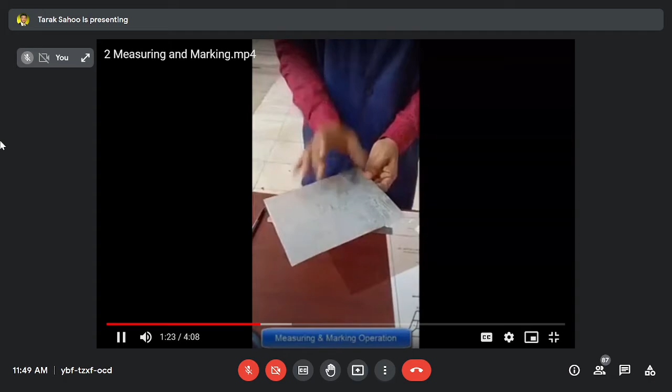Proper direction means our experiment is to prepare a square tray. For the square tray, we require a square sheet. We got the material according to instruction, and it should be a square. Square means each side should be at a right angle.

How will we check a right angle? This tool is called a try square. Through this tool we can check the right angle. First you take any side of the material out of four sides, whichever is straight. That side you keep. The try square has two parts: one is the stock, another is the blade.

You first mark A, B, C, D on the four sides. First you mark the origin point, meaning the reference side, like A. Then you put your try square like this, in any position you can. Then A remains constant, and you draw a line.

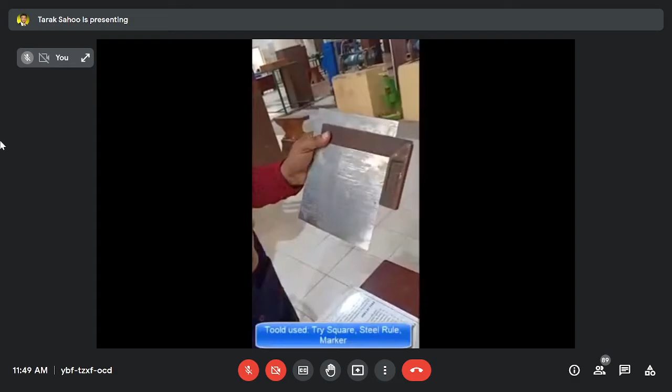So now A is the origin, meaning the reference side. It has no lines yet. This line is named B. Now A and B are at 90 degrees, according to the try square measurement. So now A and B form a right angle. You have to achieve a 100 by 100 millimeter sheet.

So from B, you mark a point on the left side, at a distance of 100 millimeters. Take 2 points for the straight line. So this is 2 points, and you have to join these 2 points, like this.

Once joined, you can also check if it is a right angle or not. Now see, it's a right angle perfectly. So this is A, B, and this line is D.

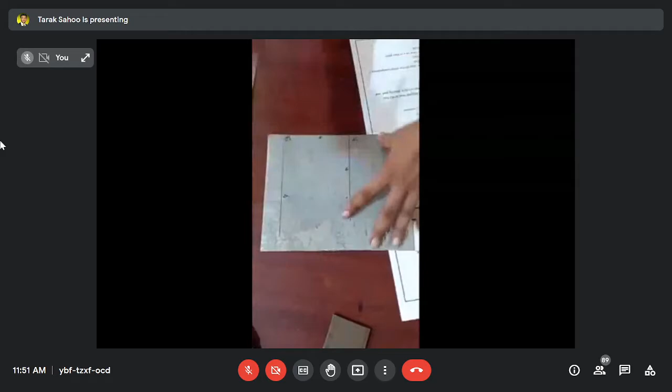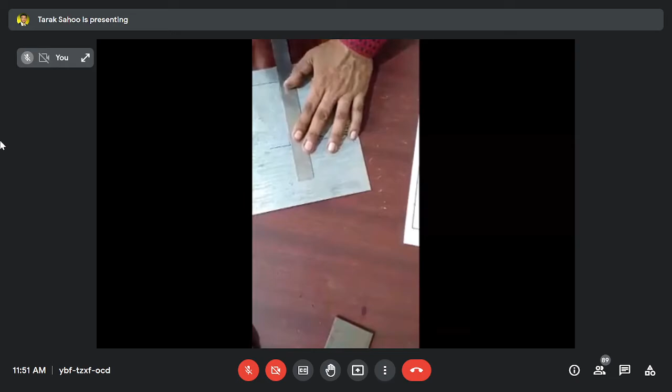Now one side is pending, A to another point, at a distance of 100 millimeters. You make point A, then point B, then connect each point, and you get the sheet. You see here A, B, C, D — this area is 100 by 100 out of this material. We have to cut this material and find out our raw material for the experiment.

So this cutting process is named blanking. Sir, can you please repeat the dimension again? Okay sir, basically we have to cut 10 centimeters by 10 centimeters from a sheet.

First I'm discussing this: if you have a sheet more than 100 millimeters in size, you have to cut it, but first mark it 100 millimeter by 100 millimeter, and each side should be 90 degrees, because you are preparing a square tray, so your base material requires a square shape. So for that reason, first measure it 100 by 100 on each side, then start the cutting. So next video you'll cut — simply first mark and measure 100 by 100, then cut, making sure each side is 90 degrees by 90 degrees. Then another marking will start.

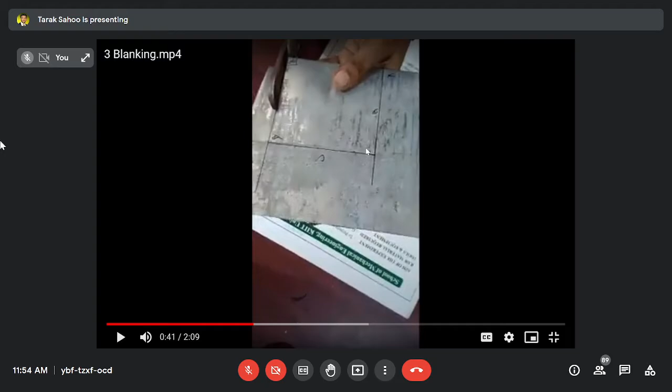Watch this video. As per the marking, you have to draw a line on your paper sheet, then you start the cutting.

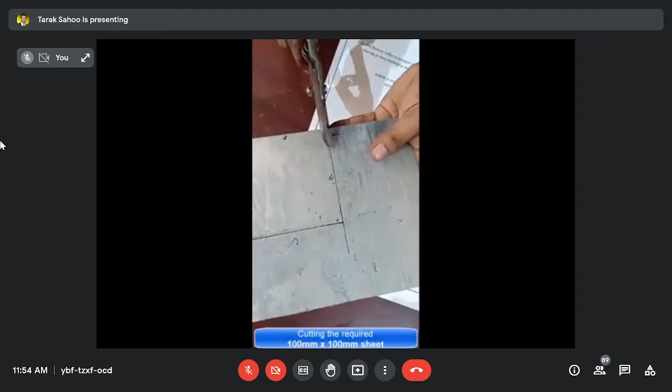Sir, can we make the square start from any corner of the sheet, or do we have to draw just from the middle? If you're taking any corner, it will be better for you because your A4 size sheet already has right angles on both sides, so you only have to draw the point at a distance of 100 millimeters. It will be better for you if you take any corner.

After this material blanking operation, once again you can check its dimension and squareness. First we'll check the dimension. You see, here is 100 millimeter and this one is also 100 millimeter.

And angle means squareness, how do you check? Once again, if this line matches, it means it's a right angle. This line matches, means it's a right angle. This line matches, then matched. If all four sides match, it means now it's perfect squareness.

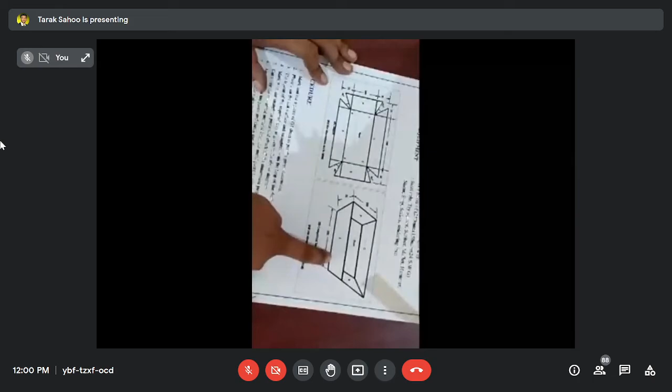So now we'll follow the diagram, the layout. Here two diagrams are available: one is the layout, another is the completed tray. So first we follow the layout. According to the layout, we have to prepare it.

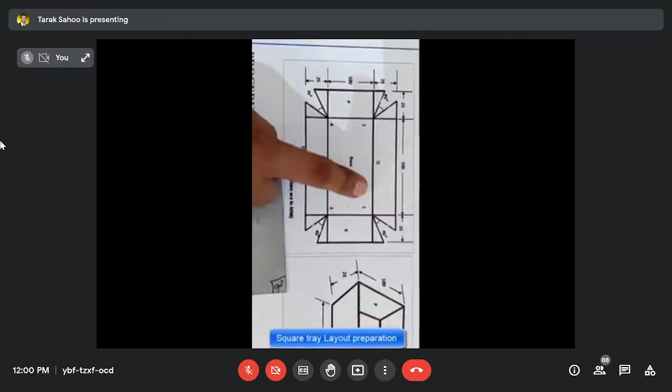First, according to the layout, we have to do the marking. Now here is the division: one is a 25 millimeter partition line, midpoint is 50, and another is 25. Same thing, this one is 25, center is 50, and is 25.

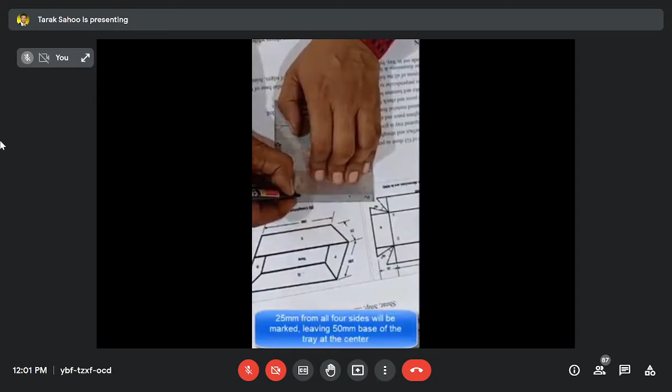Now it's complete, check once again. Sir, what was the dimension? It's 25, center is 50, another is 25 millimeter. So each side is 25. The center square dimension is 50 by 50 millimeter.

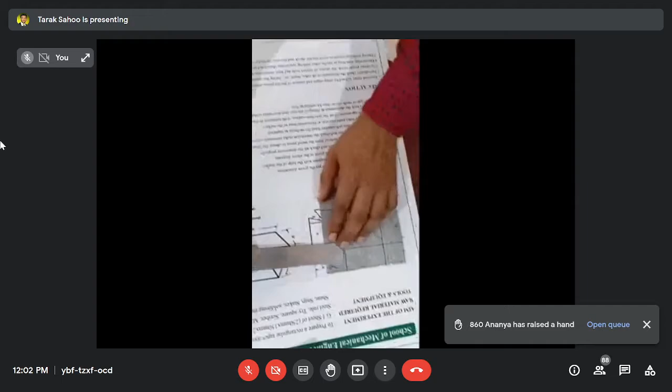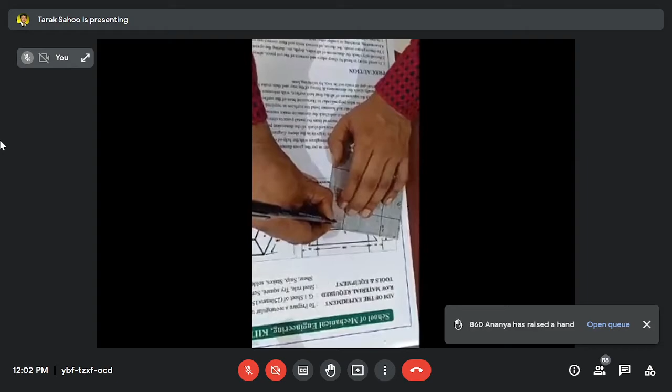Another thing: once you draw according to the instruction sheet, you will draw another line from the 50 line onward, on the right and the left, choosing any two sides. The distance for this is 8 millimeter. You make a point at a distance of 8 millimeter, like this.

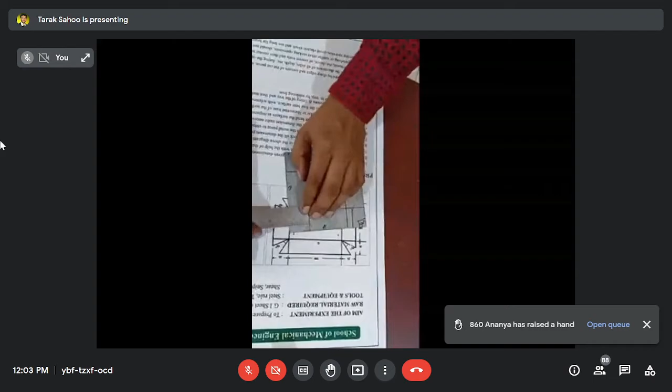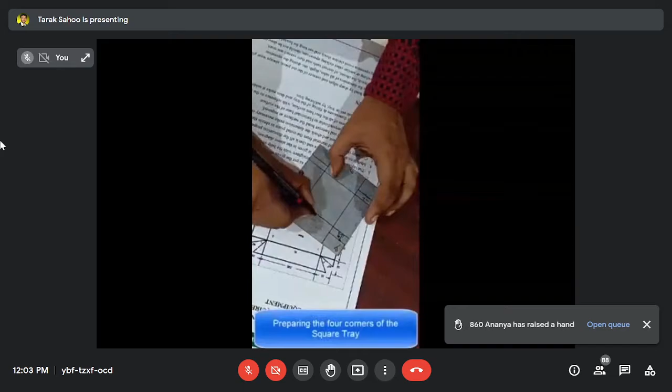Then you will draw the line. Same here, 8 millimeter, 8 millimeter, then the line. Okay, this distance is 8, this distance is 25, this area's distance is 50, and this is 25, so 8.

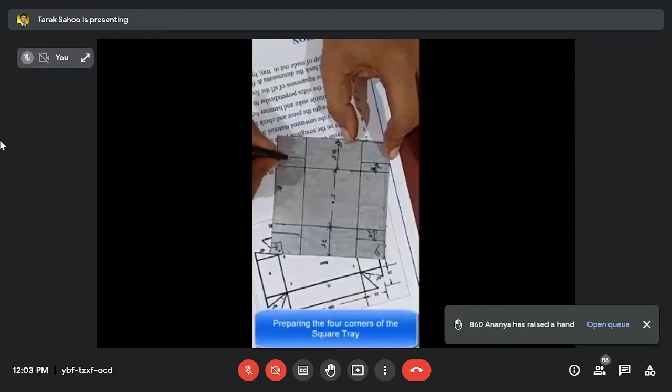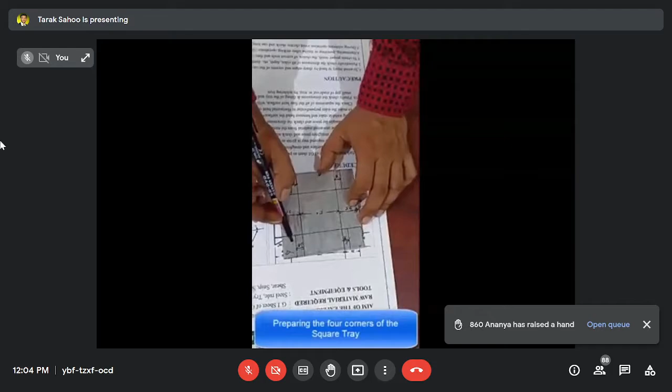After this type of marking, then we have to draw a 45 degree angle here. So how do we draw the 45 degree angle? Now, in the corner, there are already 4 small squares. You see, this is a small square: 1 rectangle, 4 small squares, 4 rectangles, 4 small squares, and in the center is a big square with dimension 50 by 50. But for the small square, you have to draw the diagonal for the 45 degree angle.

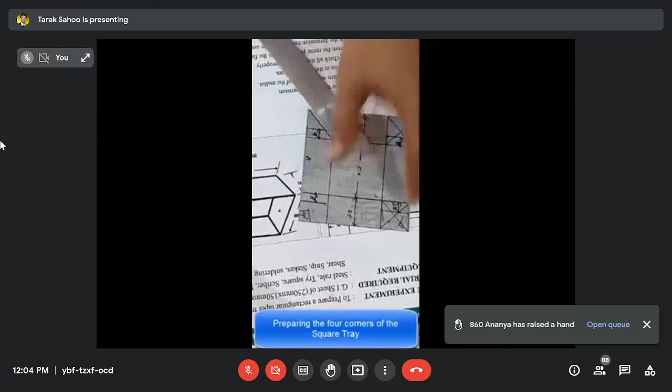Now it's okay. So you see, this angle is 45 degrees.

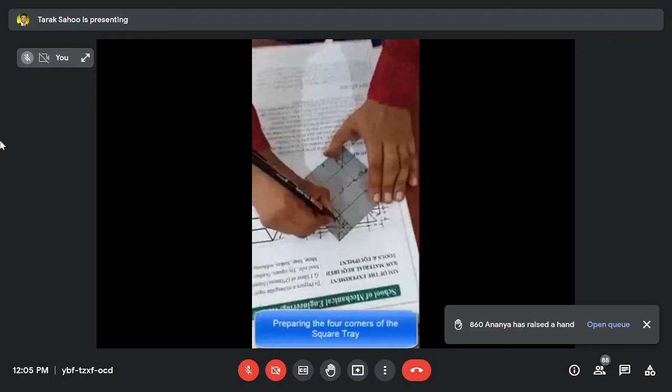So now we follow the instruction sheet and go to the next step. The next step operation name is notching operation. So now we'll follow the diagram, the layout.

Okay, dear students, now you draw the lines of marking according to the video on your 100 by 100 millimeter paper, whichever you collected. Then you draw all the lines and marking, and then show me. If you want to watch the video again, I will play it, or show you a still photo of the particular lines.

Sir, can you show us the diagonal line measurement, that 8mm diagonal measurement? Okay, once I will play the video and watch, you tell me the particular point, then I will stop the video and you watch it.

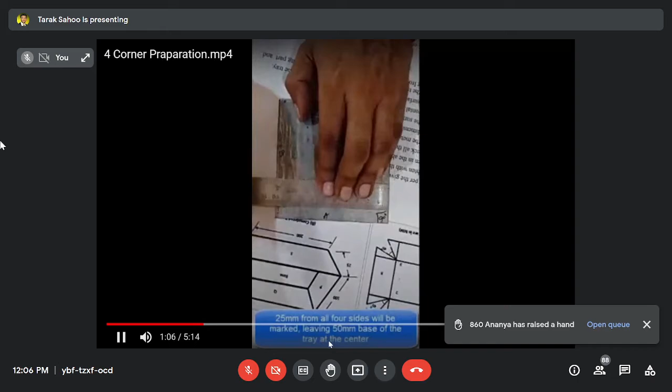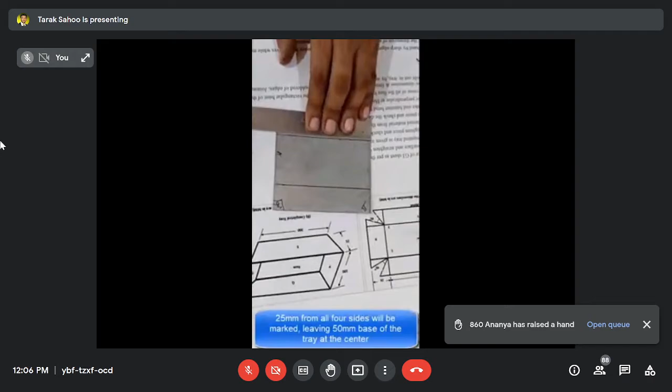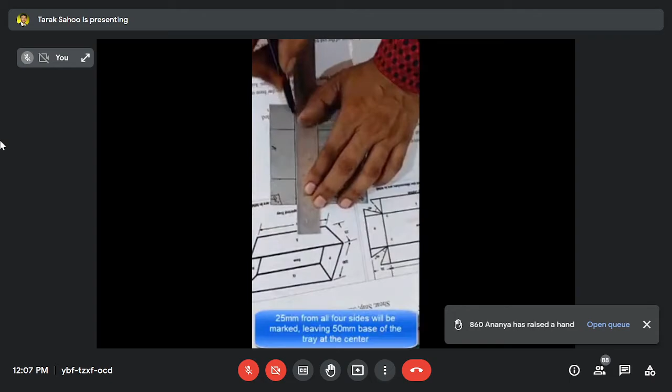So here, now it's complete. Check once again. It's a 25. Center is 50.

Follow, dear students, look, how to divide the partition line. Now, from the outer line, you take it to 25 millimeter, 25 millimeter, and draw the line each side. The center will be a big square, dimension 50 into 50. Each side is 25, this area is 25 millimeter and this is also 25. This center is 50 millimeter.

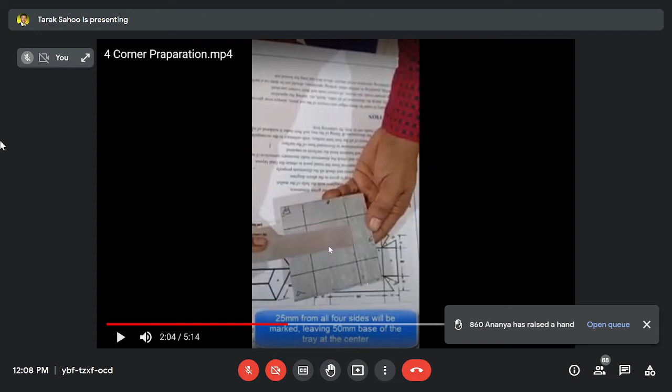So first you divide it, then draw the 8 millimeter lines here and here and here, and then draw the diagonal. You will get the 45-degree angle. Now watch.

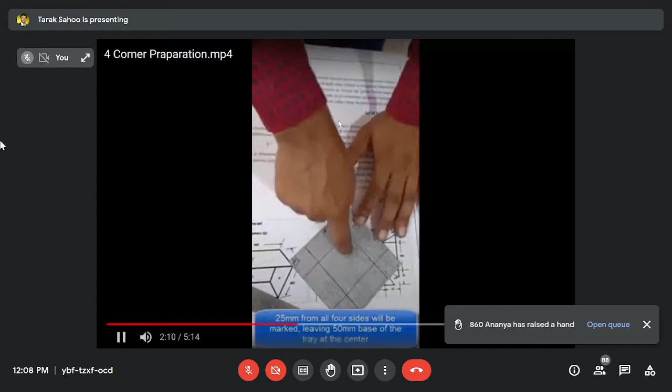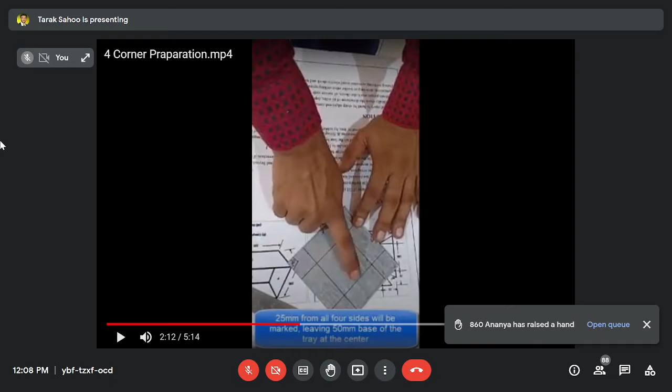50, another is 25 millimeter, so each side is 25. Sir, please mute, it's echoing. That's the center square dimension. Sir, while playing the video, mute yourself.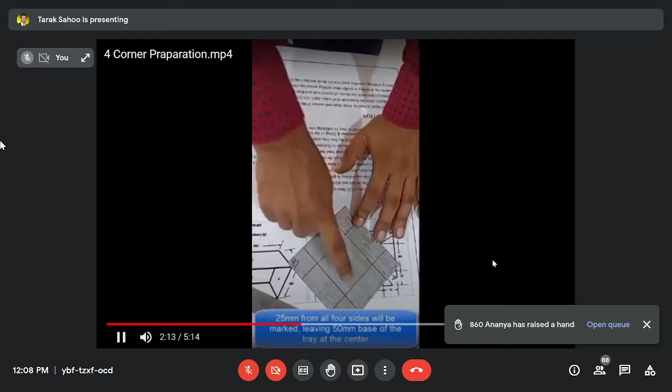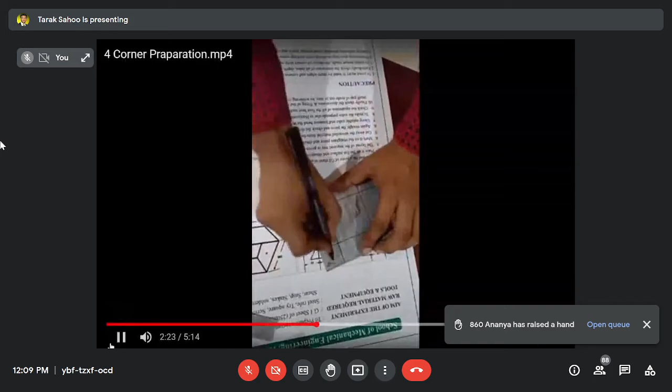25 to 50 millimeter. So another thing, once you draw according to the instruction sheet, you will draw another line from the 50 line onward, on the right and the left, any two sides you choose, which dimension or distance is 8 millimeter.

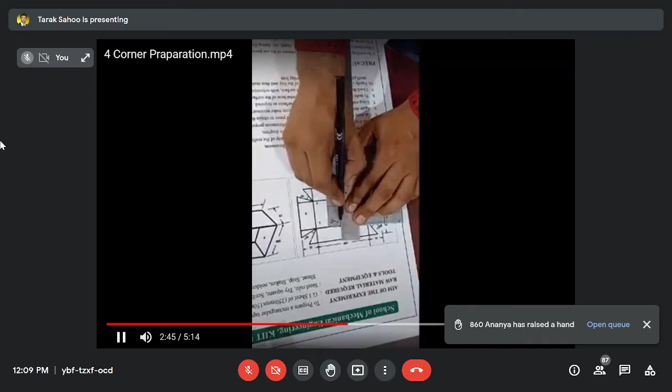You make a point at which distance is 8 millimeter, like this. Then you will draw the line, same here, 8 millimeter, 8 millimeter.

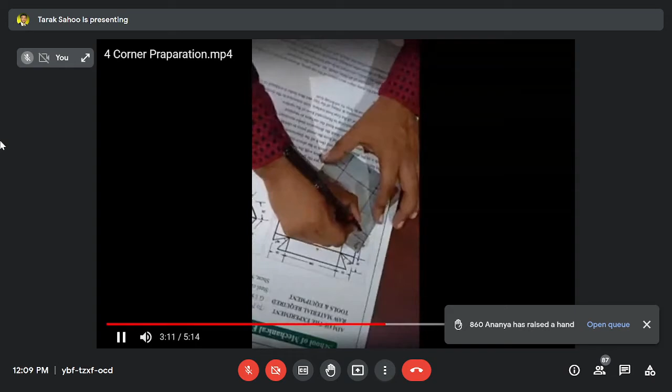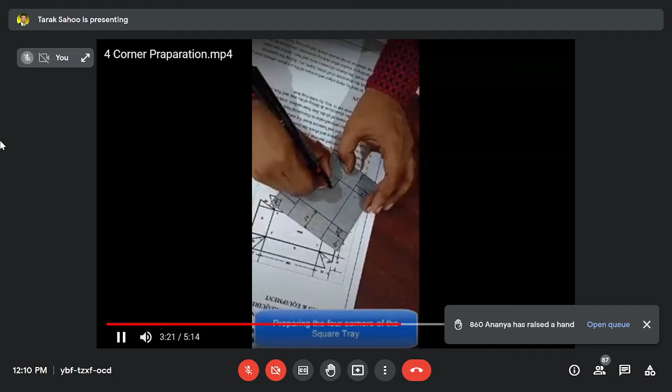This distance is 8. This distance is 25. This area distance is 50. And this is 25. So 8.

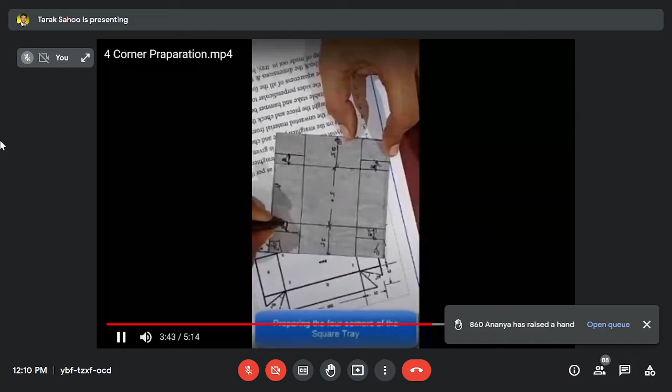So after this type of marking, then we have to draw the 45-degree angle here. So how will we draw the angle of 45 degrees?

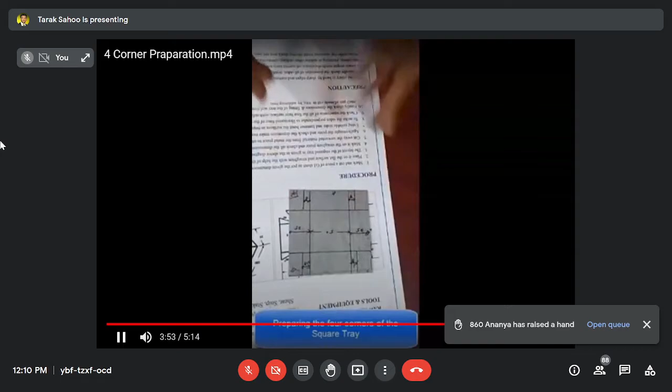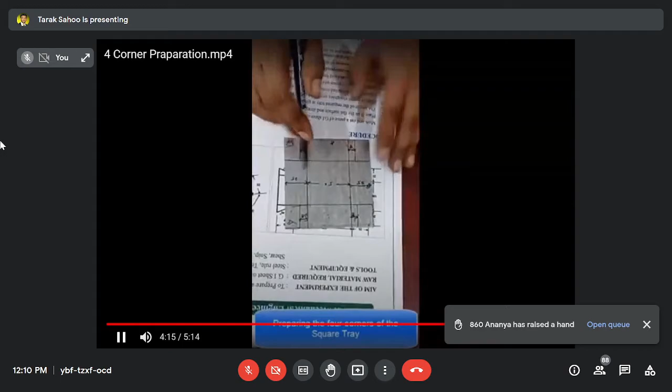Now you know, in the corner, already 4 small squares are here. You see, this is a small square, 1 rectangle, 4 small squares, 4 rectangles, 4 small squares, and in the center is a big square, dimension 50 into 50. For the small square, you have to draw the diagonal for the 45-degree angle.

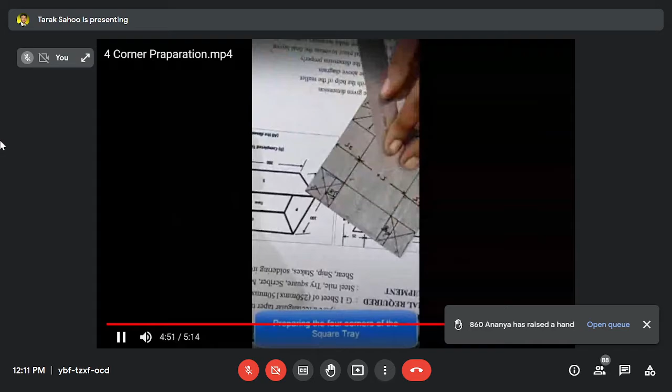Now it's okay. So you see, this angle is 45 degrees.

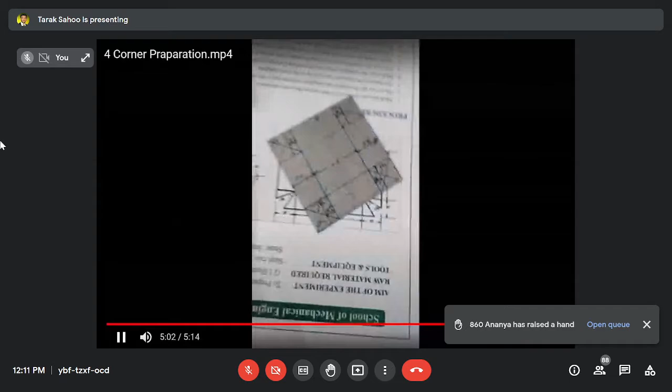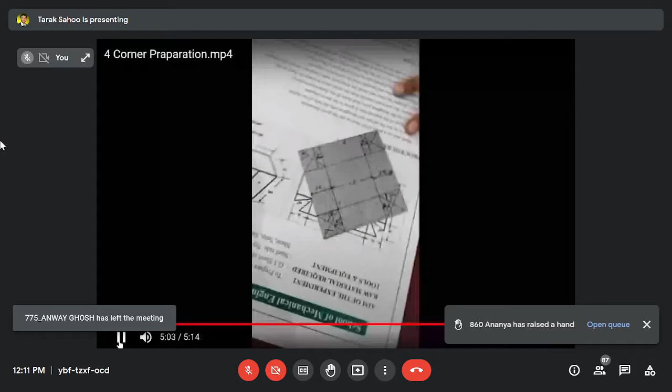So now follow the instruction sheet and go to the next step. The next step operation name is notching operation.

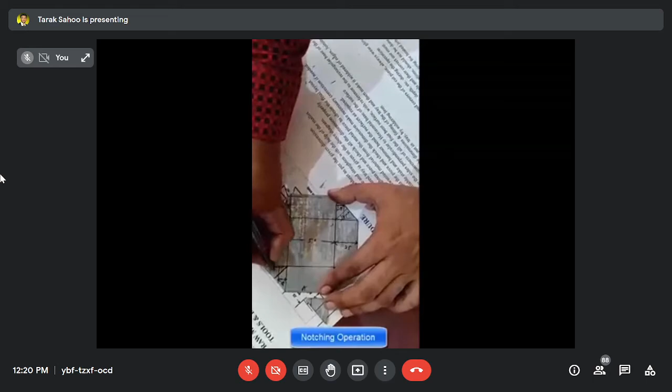You remove the triangle which is present on the corner of the small square. First you remove that by cutting it. Then, understood - another triangle is here present. You see, this is another triangle. This point 2 and 3, 4 - these 4 triangles you have to remove. How? Like this.

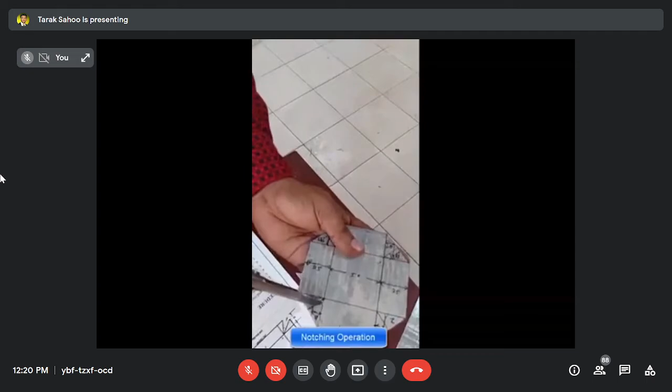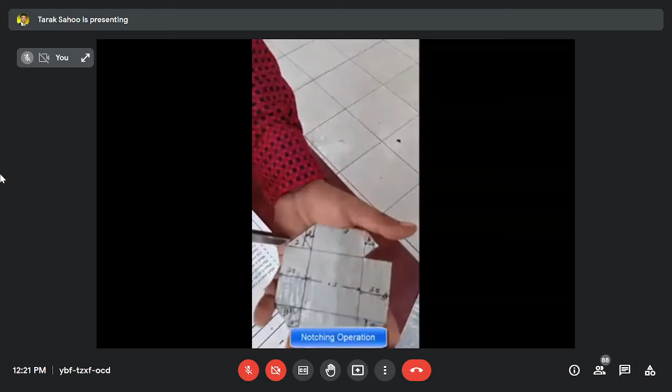Don't cross the 50 line during the cutting. Okay, then like this. Removed, you see is removed, and here cut, removed. Next.

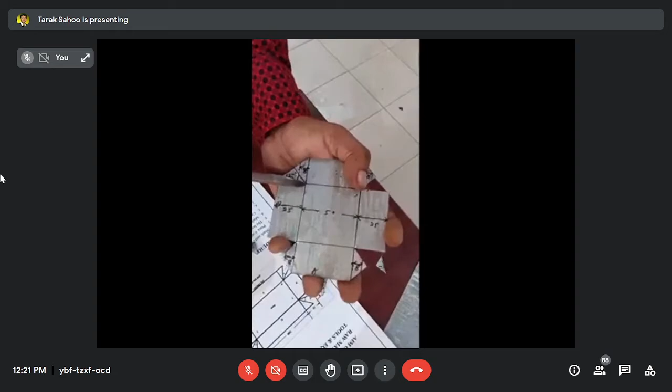Okay, you see, so after the cutting and removal of both triangles, you will get this type of shape on the metal sheet. And the next step, you have to remove another small triangle here, present at 1, 2, 3, 4. You see, this is a small triangle. You can remove it, I can cut it.

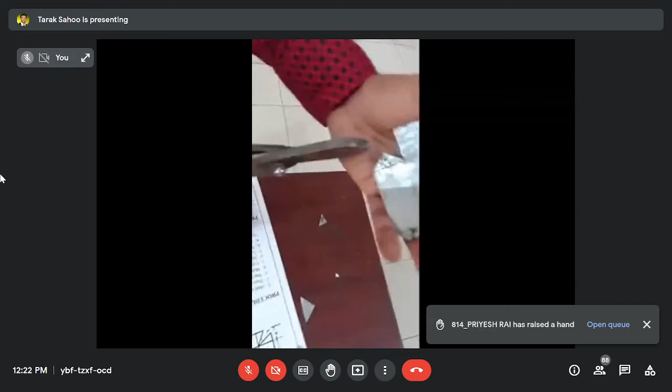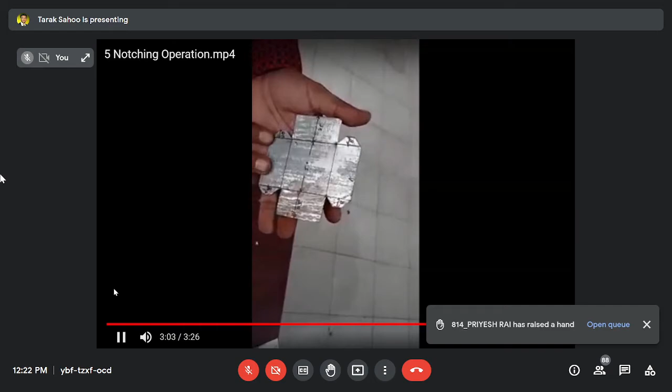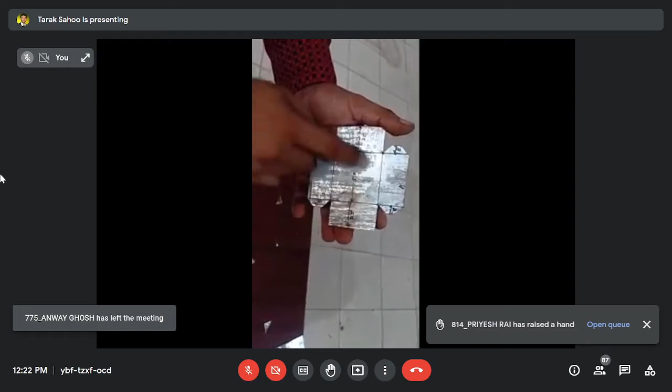Okay, so now see, after cutting we'll get a rectangle at 1, 2, 3, 4, a trapezium at 1, 2, 3, 4, and a square whose dimension is 50 by 50 millimeter, and this distance is 25 millimeter, 25 millimeter, 25 millimeter, 25 millimeter, and this distance is 8 millimeter. So clear?

Notching means, in the type you see, this is your diagram, layout diagram. First you have to cut it, and simply you remove the triangle of the corner of the small square.

Okay, so first step you remove the triangle which is present on the corner of the small square. First you remove that by cutting it. Then another triangle is present, you see this is another triangle, this point 2 and 3, 4 - these 4 triangles you have to remove. How? Like this.

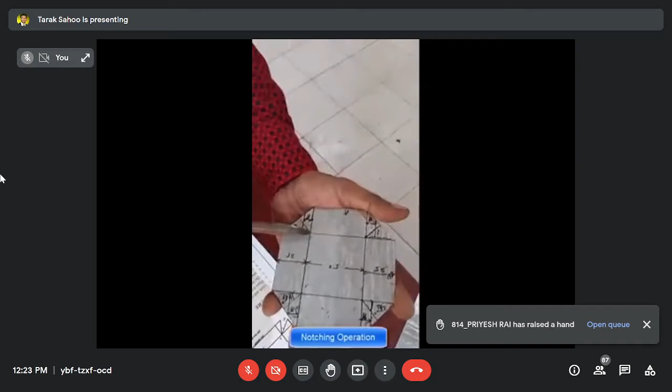Don't cross the 50 line during the cutting. Okay, then like this.

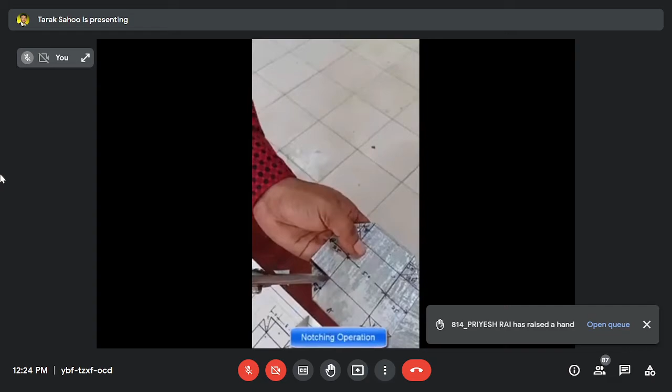Removed, you see, sir, 745, and here, sir, is it okay? 745. Okay.

A02 first, okay, sir, 755 done sir. Okay, 767, 34, 46, Saurabh. Okay, so 56, 751, 51, okay. 58, 51, good. 14, yeah, perfect. Ananya, yeah, 861, okay.

So you have to cut the 755. Yes, your dimension is not perfect. Your wait, 55, your dimension is not perfect because the center should be 50 by 50 and each side the height of the trapezium should be 25 by 25. But your height I think is 15 or 10 millimeter. You once check it and prepare once again. It is wrong totally. No sir, it is right but slightly off. No, you look, cutting means the area dimension is not 50 by 50. You check once again. Okay sir.

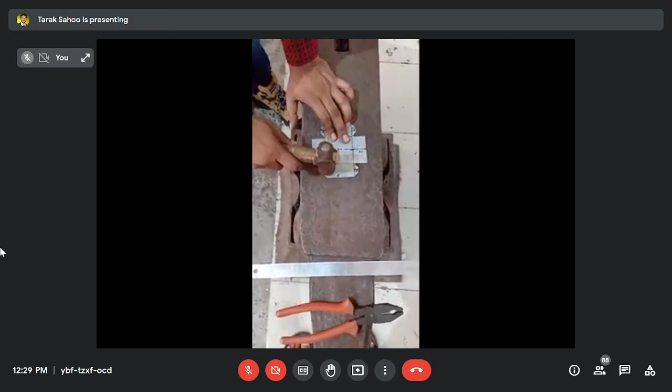Before bending, you have to make a plane surface. How? Through the hammer on this anvil, you put your sheet on the anvil surface, on the anvil face. Then you give a small blow, a small amount of pressure, just striking lightly. Don't strike heavily. It will be flat and straight. Now it is perfect.

Next step is the bending process. What is the bending process? Bending is one type of process through which we apply some amount of pressure or force to a particular point to find the desirable angle or shape on the sheet. This is called the bending procedure.

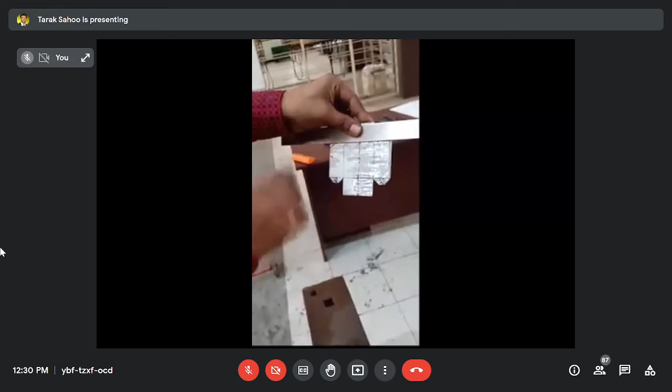Now we keep a steel rule on the line of 25, like this. And this is a plier, it also helps to bend the material. You keep it on the surface of the anvil both at a time, you can fold it with the steel rule, and you hold both the steel rule and the sheet at a time, and you apply pressure to get the bending. Same for another side.

Look, after bending, we'll get this type of shape, but this is not perfect. Why? According to our instruction sheet, we have to make the size 50 into 50, the area of our base, and height should be 25 into 25. So first we have to check it, is it 50 or not. You see the 60 above, and another side is 60 above. It means it is not perfect, we have to make it square. Square means the base should be 50 into 50, meaning the top should be 50 into 50 millimeters. So how will we make it 50 into 50?

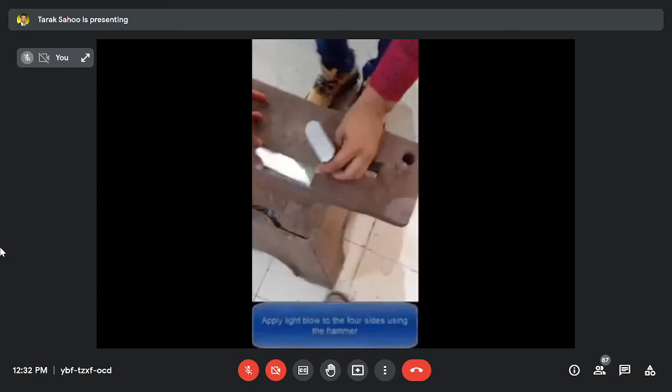How? Now, one procedure: put this edge, you have to strike. You see, now this one is 50, this one is 50. This means our tray dimension is perfect now.

This means we confirm my dimension is perfect, meaning you have to lock it. This trapezium you have to bend and lock. How? This instrument, which I told you about in the first, this is a vice, the holding device. It has two jaws, one movable, another fixed jaw. If you want to hold some things, some tools, like this stake, this one is called a stake.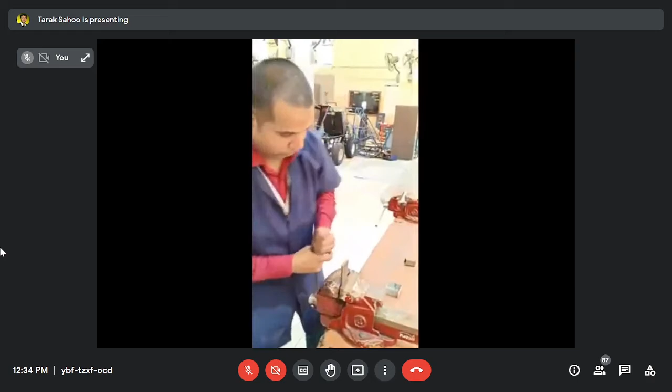So according to the stake, you have to make it. First, you have to hold this one. How? Like this, we hold this one. Okay, you see? Now it's perfect, you have to only lock this four side.

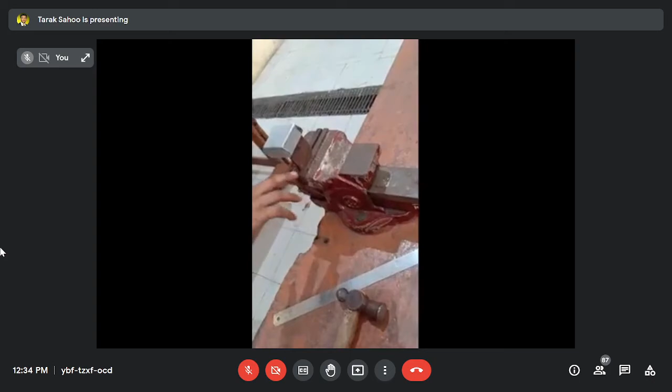So what should we do? Now first, you keep and put your tray like this on the stake which is fixed on the bench vice. Then you place your fingers and pull outwards. Then you hold your hammer like this, not like this. Then you apply pressure by striking.

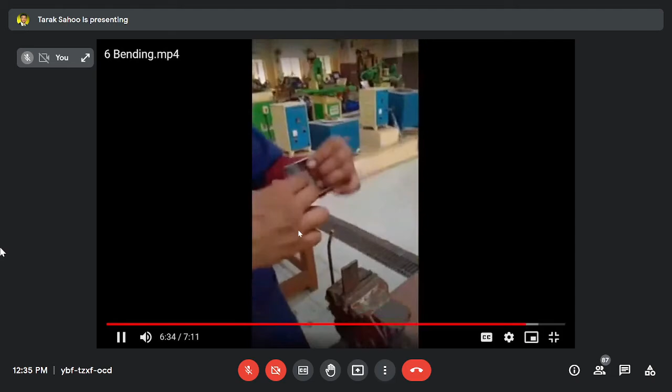Okay, now see, it is locked. It will never open because we locked this one. You see this folded.

Okay, then once again we'll check. It's a 5 and it's a 5, means now it's perfect. One thing, after the folding, there should be no gap between the two metal pieces because you have to join this surface through the soldering process.

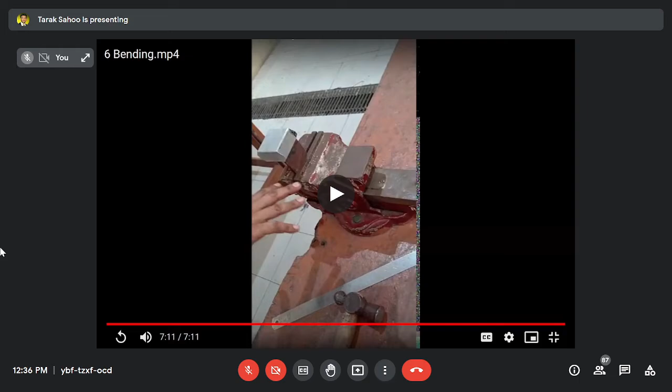Sir, we will stick the ends with gum. Yeah, so now you fold your sheet, paper sheet, on each side, 4 sides there, means only 25 will fold. 50 is your base, like this. Miss, yeah, like this. And on the blockage, the lock area, you use the glue. Like this, sir. Yeah, you use the glue. Okay.

Okay, so wait. So after completion of this video, one more video is there, and one is the soldering process. So after 10 minutes, you complete your paperwork. Then you write your name or number. You send the photo, and I will give a link to you. So now you watch another video, which shows the soldering process, meaning how to perform soldering after completion of the folding and bending operation.

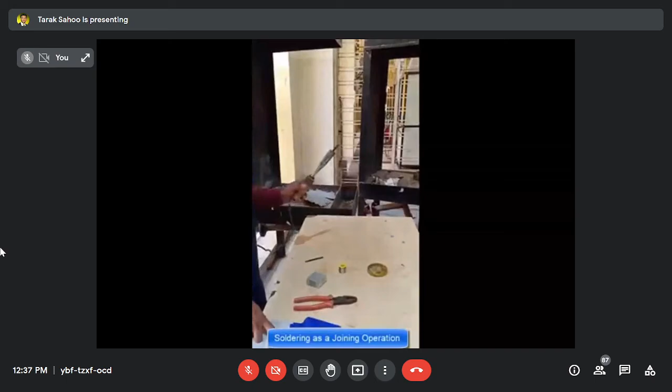After the bending, we will start the joining process. Sheet metal has many types of joining processes like soldering, brazing, riveting, hemming or seaming, but here we have to do soldering operation. For the soldering operation, we'll use plier, hand gloves, flux, solder and soldering iron. So for safety reasons, you have to wear your gloves first.

Then plier. Why is plier necessary? Because this instrument is very hot, so when you hold it by your naked hand, it will damage your hand. So always use plier during the soldering operation. So first we'll check if it's perfectly hot or not, because we have to melt this material. If it melts, it means the soldering iron is ready for the soldering operation.

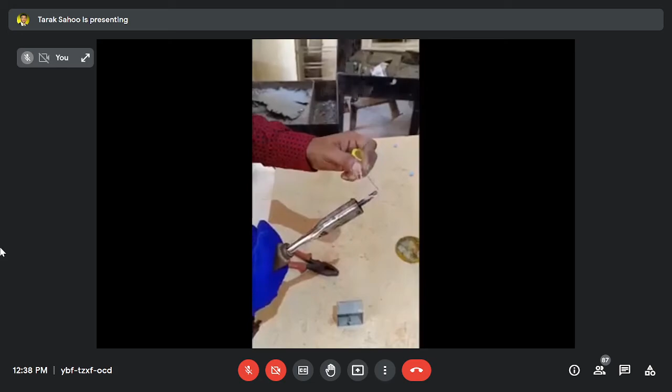So before soldering operation, any type of scratcher material will be used for scratching the edges on the part we want to solder. Why? It helps to easily solder on the surface, because any type of carbon or foreign material deposited on the surface of these edges makes soldering not easy. So it is necessary to first scratch this portion before soldering.

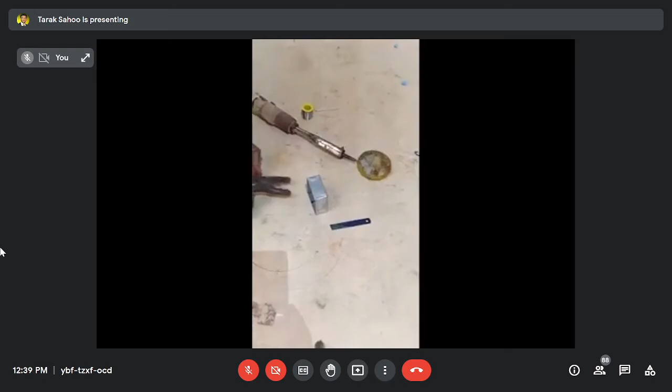Now you hold the soldering iron and solder. So flux, when will you use it? Flux is really used. Why is flux used? Flux is a material with zinc chloride which helps protect the body from oxidation and separate the impurities of the metal material.

So now real use means just a needle point will be used before soldering. You can use it here, and you hold the soldering iron in the right hand, solder in the left hand. At a time you put it on the tray of the base metal which one you want to solder.

One join, two join, three join. Then you hold it like this and make an angle of minimum 60 degrees. Your soldering iron should be held this way. Keep it for some seconds on the surface of the tray, it will melt your material. Then you move your hand backward and forward like this.

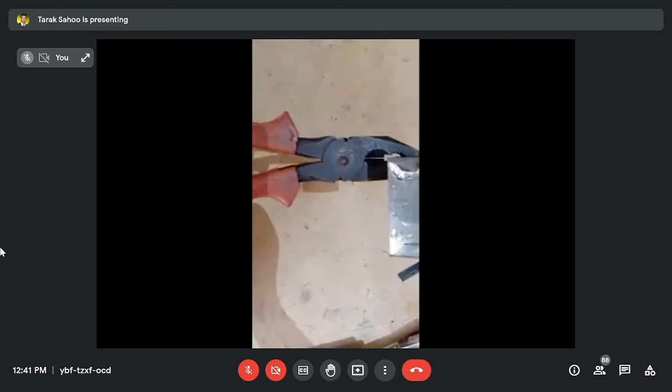Okay, you see, this is a solder. Next.

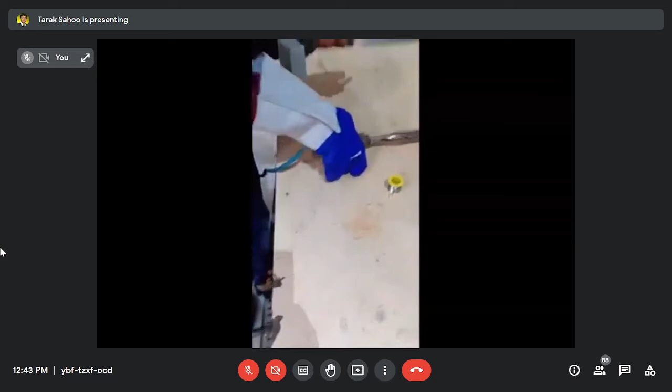Keep soldering. You put the tray aside for a few seconds because it's very hot now, so it will cool down. After it cools, the soldering operation will be complete. Why is soldering necessary? Because after completion of the tray, if you put something in it like water or oil, the leakage problem is solved by the soldering operation.